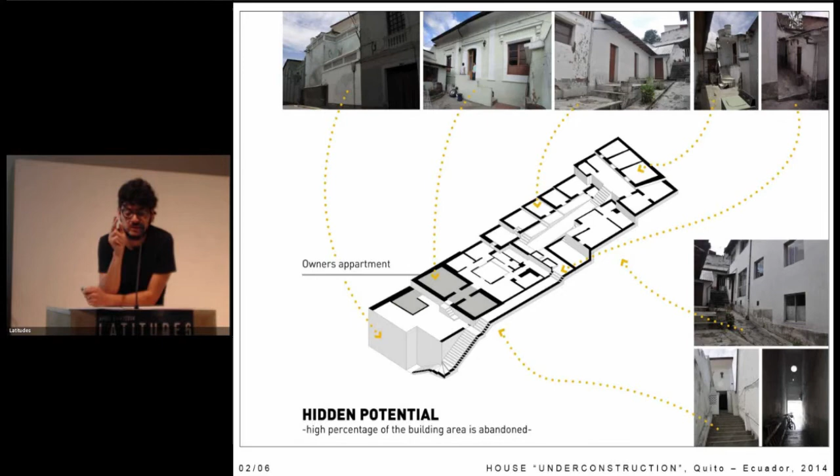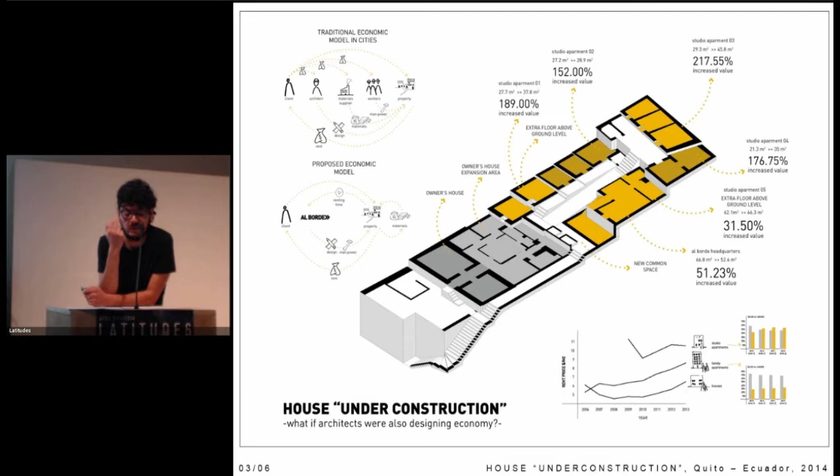And of course, we did the first stage, our headquarters. The next week, we'll begin the second stage and so on. We expect to finish the project around 6 months.

We learn recycling buildings by a punctual intervention that could be replicable, adaptable, or transformable. So we are proposing a micro-intervention of macro-scale ambitions, and we thought, what if each abandoned house had the opportunity to reborn?

All of this could happen in our minds because we understand resources are more than money. It's completely possible to build a school in the middle of nowhere with a $200 budget, when besides money, you have resources you have on hand. We created a list of resources and realized that $200 is a good budget.

Finally, we had a build-it-yourself strategy, and the community, the teacher, and us would be the manpower. We also did a volunteers open call. When architecture is dealing with hard realities, usually architecture as definition is the last part to solve in the equation, as you could see.

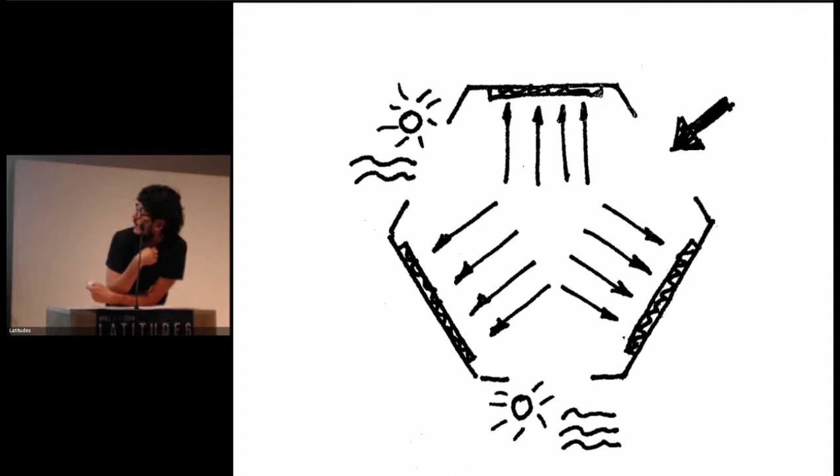Primary schools in Ecuador have 6 levels, 2 levels in each phase, 2 facades for light and ventilation, one for entrance, and it's perfect, clear, it works. But it works for a traditional school system. This school promotes learning by motivation, and of course, it should work differently.

On the other hand, we wondered why people here in this community, on that beach, only build floor plans as a square or rectangular form. And it's completely obvious - a regular form has less waste, inherent sustainability. Later, we learn that they also build square or rectangular floor plans because they don't have any external references.

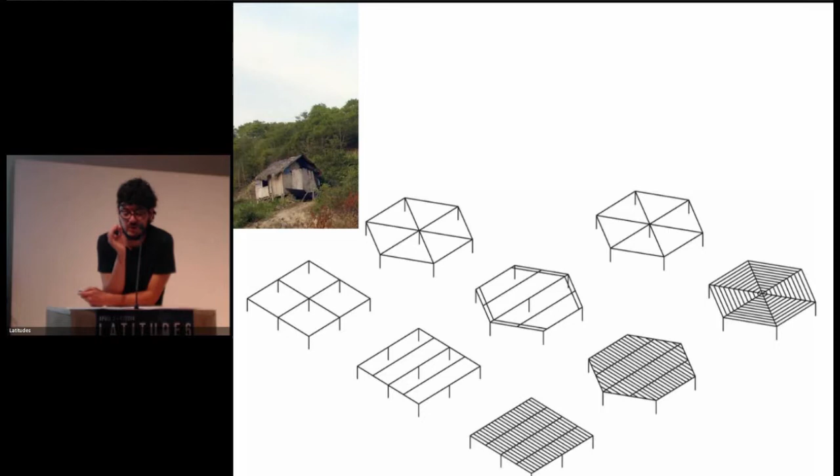Highlight this in your mind. You will need it at the end of the lecture. We learn that they also build square or rectangular floor plans because they don't have any external references.

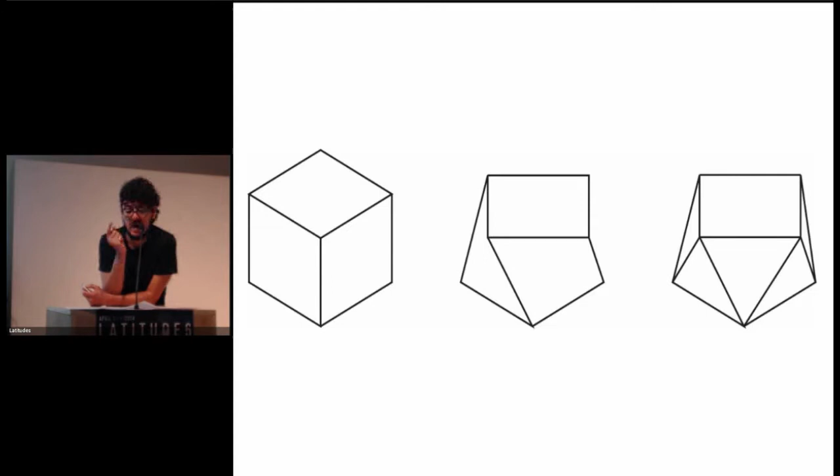So we decide to start with the basics, with the resources that we have on hand. We began with a square base, with a framed wooden structure. And of course, such a basic structure will tend to twist and would require diagonal bracing. We started with the resulting torsional structure and with the diagonal braces that are part of the structural system.

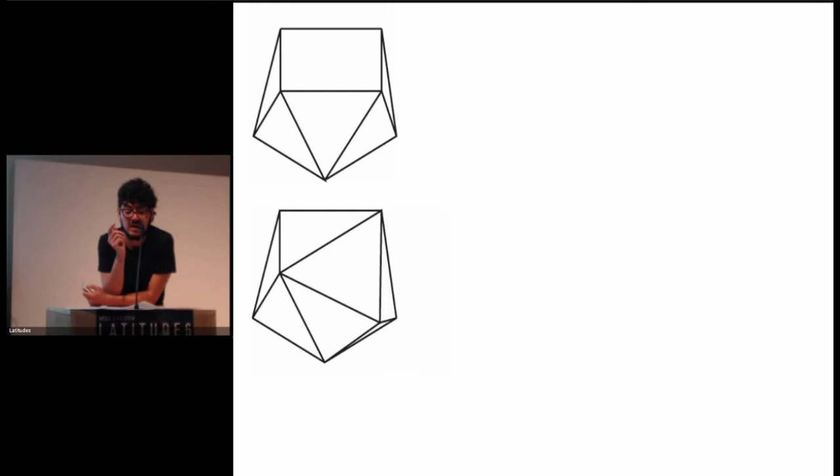Then we knew the cover couldn't be flat because the cover materials would be made of straw, which requires it to be inclined. So we put a ridge cap and took down the two edges. And finally, we raise it on pilotis.

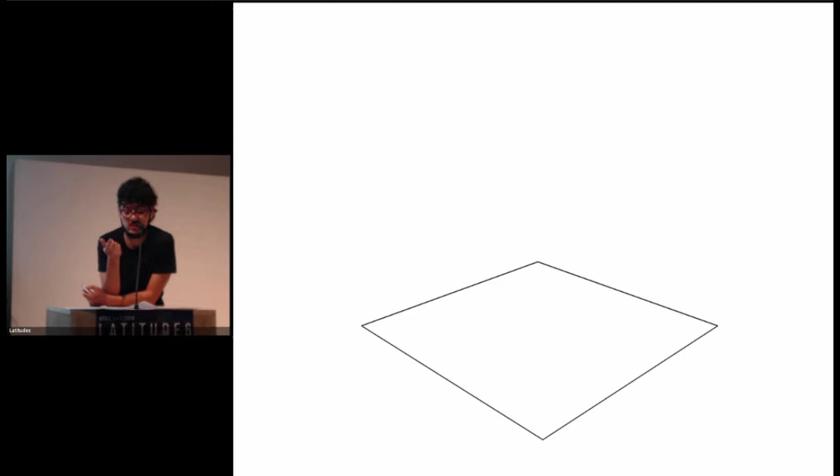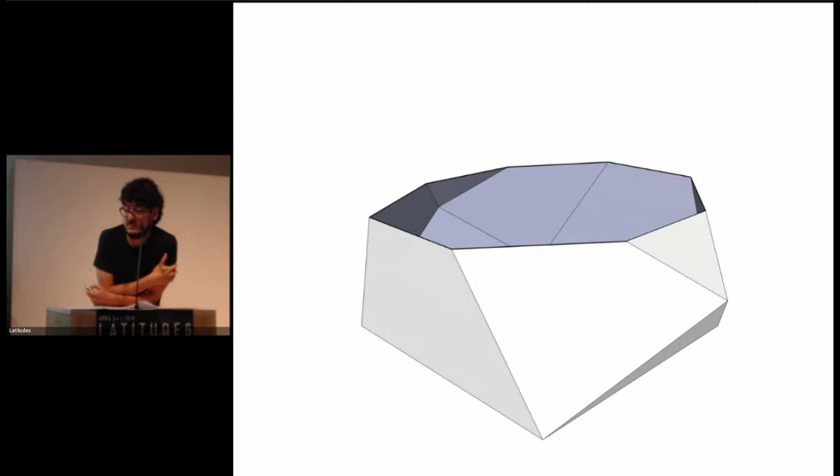And voila! We have a project with a 6 meter square base, easy to construct, a space fully dynamic that promotes multiple uses, and ready.

Now, let's move on to the construction phase, the construction stage. With a 1 to 10 scale model, we worked on the hard part - the nodes, all of the nodes.

We searched in technical books how to design these nodes. And of course, there were thousands of options. The problem was that a single node may cost the same as the $200 project budget. Obviously, it was out of question to tell the teacher the project couldn't be done because the nodes were expensive.

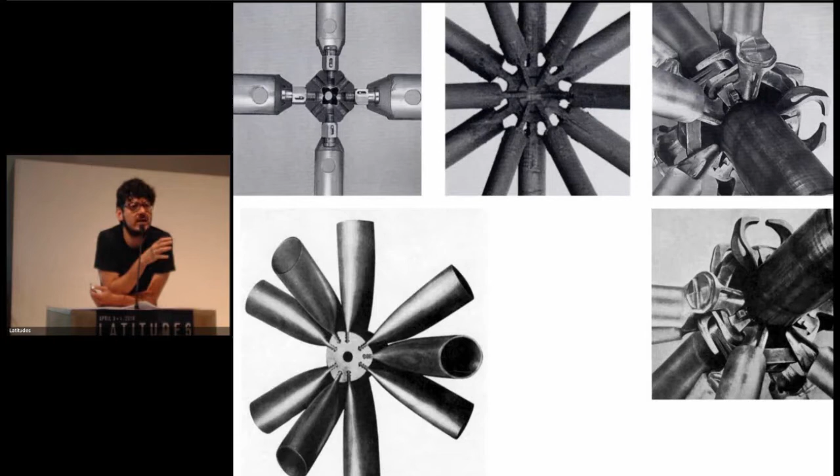We can't hide behind the lack of budget - we must figure out a way to execute the project. So let's look back: how were nodes made before society had access to elaborated solutions? We found that the nodes were solved with cowhide.

We always had a great team of interns willing to do anything to contribute to the design process, very motivated and passionate, and they were the ones - Pablo and Javi - who went to search for the animal. Tests were made, and the tests were made, and that was it. Problem solved - the nodes are solved.

So the project was achieved in a very simple way. Everything was systematized, not only to be able to build with volunteers, but also because it makes the construction process easier for us.

This insane systematization is the lesson we learn, because we were students of Jose Maria Sainz, and later we worked together, and all of this information he gave us about systematization and rigorousness was recorded very deep in our minds.

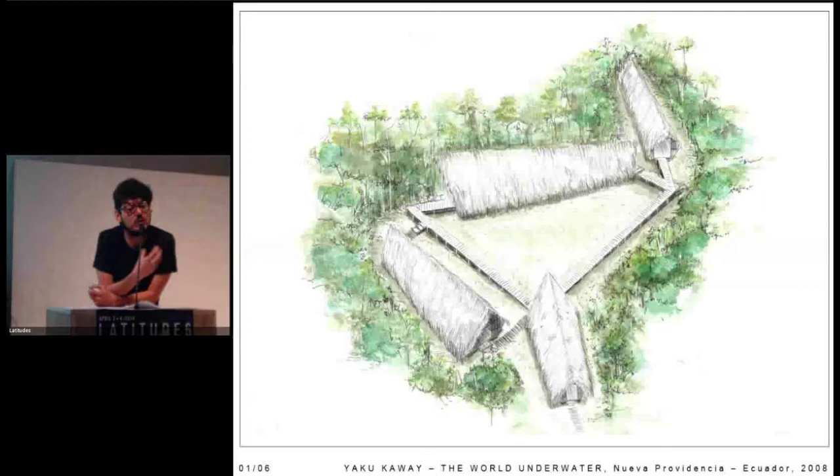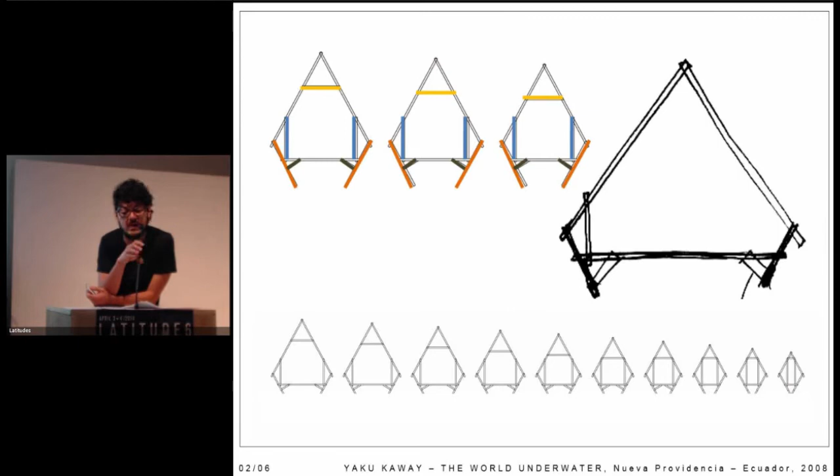Coming back to the scaffolding, we went to the beach, set up a camp, and started to build. With less than a week's time, the project was almost completed.

We didn't care if we finished it or not. When we are working with a participatory process, the empowerment is so strong that the project is achieved very rapidly by the community itself. It is very different from working with charity logic or like a typical NGO giving projects, which are quite difficult to maintain over time.

We really hate charity. My grandmother used to say, when it costs, it hurts.

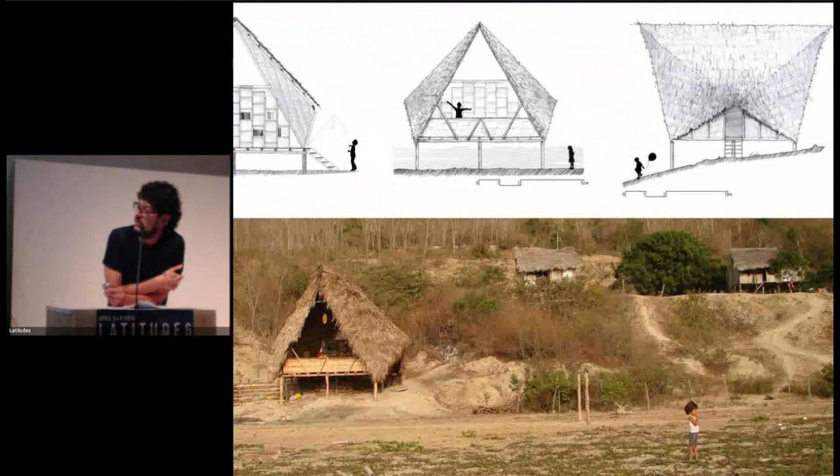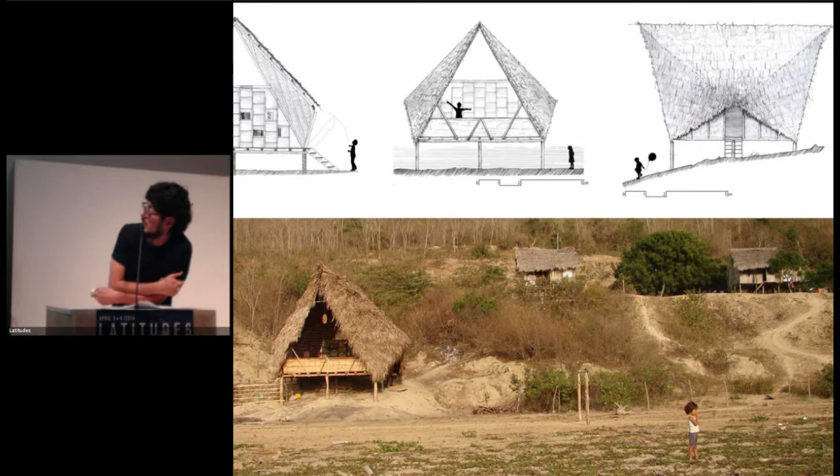The context adaptation is inherent. We use the same materials and construction techniques that local people are used to building with: wooden structure, elevated on pilotis, bamboo or wood walls, and a sloped roof made of local straw. The difference lies in the design.

The project beats all our expectations. The teacher told us, half joking, half serious, he doesn't know if kids are coming to the school in quest of knowledge or to play opening and closing the door.

Each detail was designed. The furniture, one of the keys of the project, was made of two pieces that are easy to assemble.

This, what seems like a parametric design, is actually not. It is the result of an accumulation of errors of the back wall. It's kind of an X-ray of all of the errors of the back wall.

And when working with unqualified manpower, it is necessary to develop mechanisms to take advantage of error. The project is so simple.

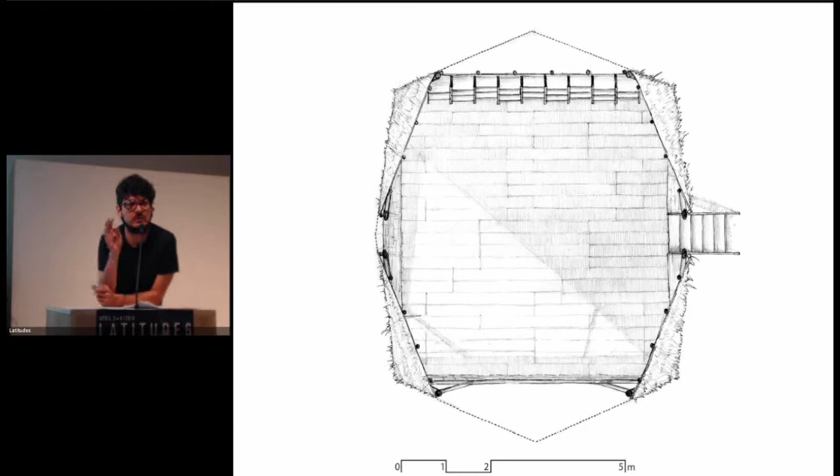Free plan to promote multiple spatial configurations, and a big storage wall. That's all. And the storage is open so that all learning materials are visible and promote their use, and is part of the learning methodology to learn by motivation, because you have all of the materials accessible to the kids, and you can try all of the configurations.

Every time that we go to the beach, the configuration of the floor plan is completely different. Before New Hope School, the nearest school was an hour and a half by foot.

It was assumed that the story would end here, but not. The project was very successful, more than we could expect in our best dreams. And not only children came, but also adults who wanted to share and learn. The new community center would be 5 times larger than the previous school.

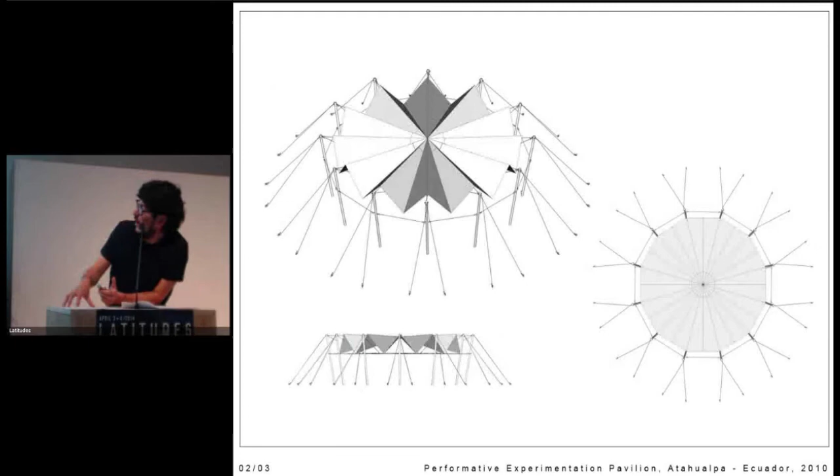It is pure geometry. The quest for material optimization that we always look for would always lead us to search for the most efficient structure. And for us, simple structures of high performance are the best option.

Once more, the project isn't over in the established week of construction time. As I told you in the first project, it doesn't matter. The space was immediately conquered.

The spatial potential was understood little by little. The limit of the use of the space is the imagination of the users. It can be adapted for teaching and community activities.

Inevitably, unexpected uses appear. And please, someone could please explain to the kid that according to Neufert, this area under the pitched roof isn't considered useful area.

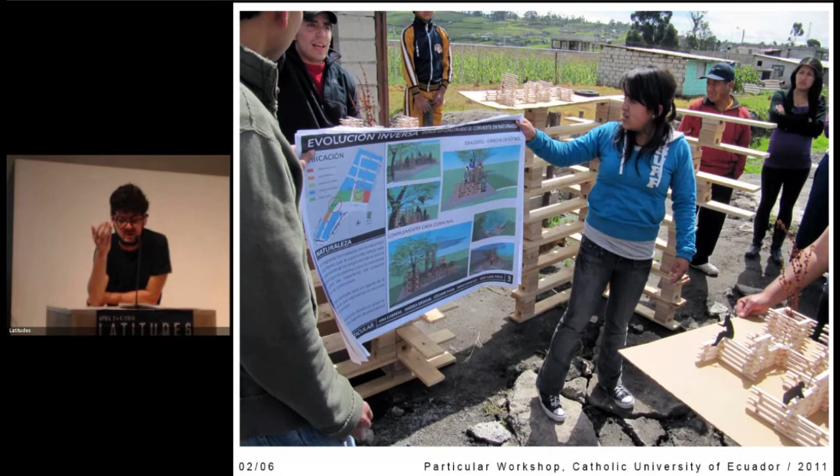But when they build by their own hands, there is a twist in their minds. And they understand that when you know the materials and the construction techniques, you think with your hand. We really like this breakpoint moment because it happened to us and it was inevitable. Our mind changed too.

They know how to build. Here are a couple of images of the workshops with the students in different places.

Back to the beach. They know how to build, and they are experimenting with the space.

What happens if we create a school of architecture in this beach? We began to think about it, and we began to ask ourselves, what is essentially necessary to make architecture, or to teach architecture, or to learn architecture?

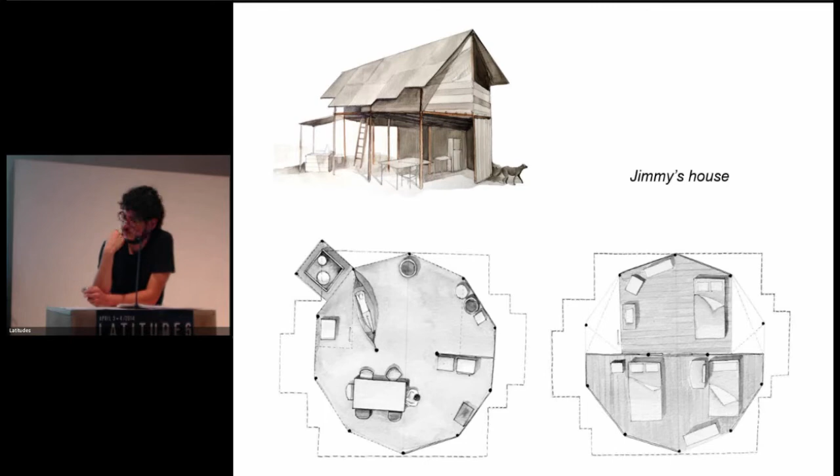And the answer was: first, to be aware of the reality that surrounds you. Regular architecture students are not. People from the beach are.

Second, to analyze and synthesize abstract ideas. Regular architecture students are familiarized with it.

These people are not. Third, to translate those ideas into a space. Once again, people from the beach are not familiarized with this process. Regular architecture students do. Fourth, to know the materials and the construction techniques.

Regular architecture students don't know much about it. They do. So, if we create a school of architecture in this place, maybe we should concentrate our attention on subjects 2 and 3.

So we arrange a 4-day workshop each month. We didn't know what could happen, but we were really interested to push up the limits of the teacher, of the community, and our limits.

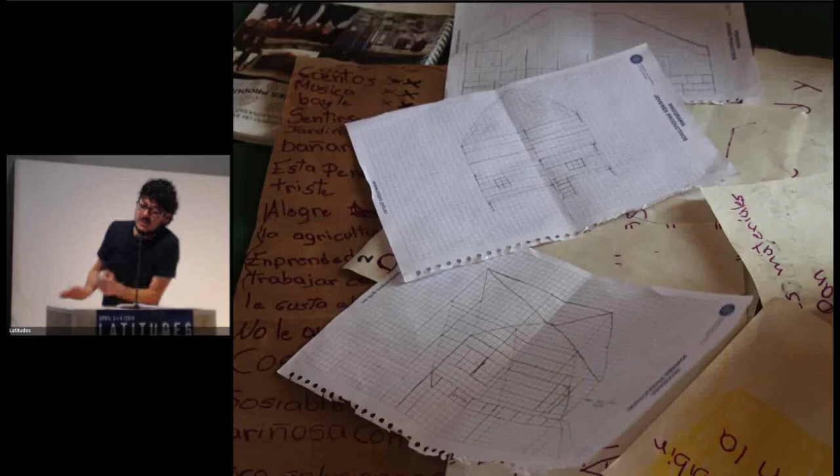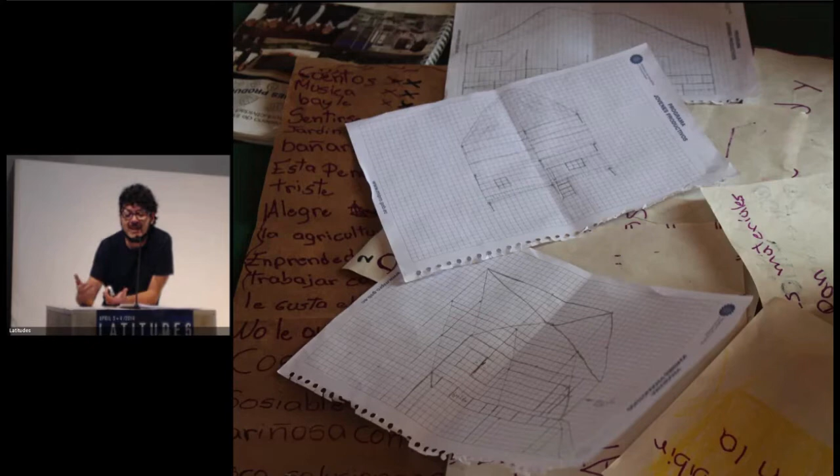We designed one workshop at once. This is a complete adventure. We are completely free to change the syllabus because we are the school as much as we want. So we can do everything that we want and begin real experimentation on site. We don't even have a deadline to finish the projects. Total freedom.

We have completed 8 workshops by now, including conceptual approaches to furniture design. We have 16 students from age 14 to 72 years old. The design methodology consists of a process which starts with no preconceived ideas, pretty similar to the methodology that we use in the office.

Then the students make an exhaustive investigation about the variables included in the project. We started with the kindergarten as a real project exercise, so the students investigate the teacher, the children of the community in the age of 0 to 6 years. Then they analyze and synthesize the data into a concept idea and concept model, and they built concept models.

This is the idea that they are working on. Then they translate it into a constructive model using local technology and materials, no CNC plotters, nothing like that. All of this is worked on by them.

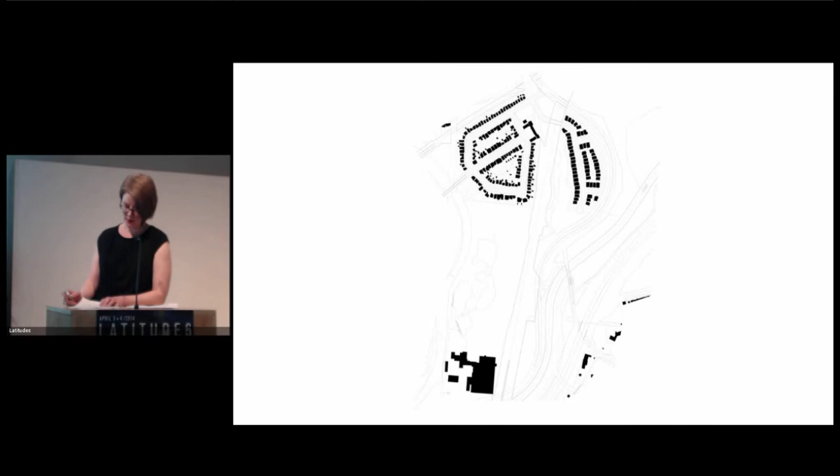Looking at this map of Toronto that shows the ravine and figure ground, we see that our urban work is spread across the city, from denser interstitial sites in these smaller neighborhoods to ones that back up onto the ravine system. One such project, the Bala Line House, is situated on a ravine that has an old rail spur across the bottom that connects it to the site of the former brickworks that literally built the city of Toronto.

And here we have the block configuration. You can see all the houses are kind of lined up here, and then the ravine starts here. The property line ends here, but then this is basically a natural conserved area.

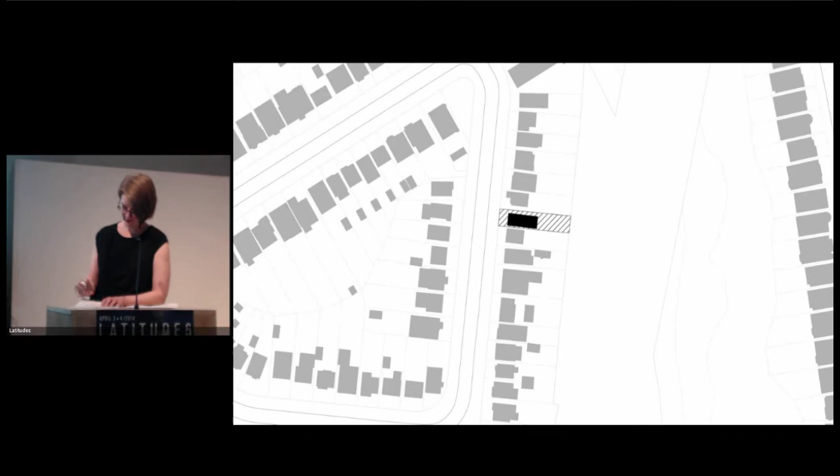As you can see, the house has a massing that slots into the existing lot designation and marches along with its neighbors. So this is the front here, and it goes back as far as we could, but getting a site on a lot on a ravine is actually quite difficult in Toronto.

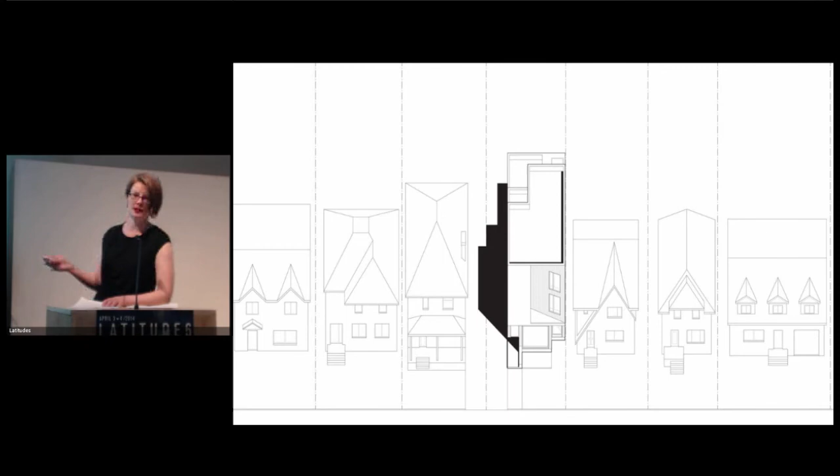So as the front elevation kind of holds the front line, the back has to step back to allow so that there's no tremendous runoff into the ravine. And this house is not quite done yet, it's still under construction.

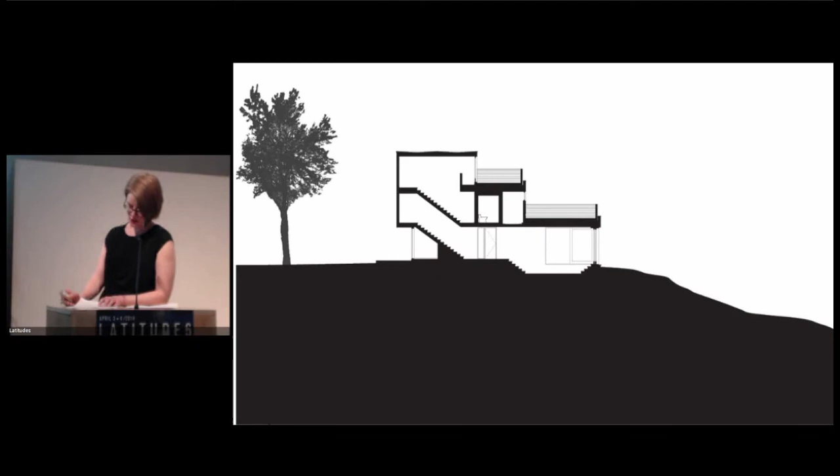In section, great effort was made to reinforce and replicate the slope of the ravine as it figuratively comes up and into the house. The reciprocal view from the living room is framed and shared with the kitchen and dining room a half story above, and even from the front of the house.

So if you open up the doors in the front and the doors in the back, you can actually see right through. And one of the reasons why there's so many large movable walls is not only for how it looks, but recently we've been getting a lot of requests, which is a little bit of a surprise to us, for houses that don't have air conditioning.

And so the mechanical system is very light. It's a warm floor with radiant heat, and there's a provision for a condensing line, but we didn't install anything when the house was built. So you open up the front and back of the house, and all the warm air flushes through.

So just to follow up on that last slide, even in the city, we have projects that endeavor to capture the landscape, frame it, and create a domesticated experience.

The primary focus of this talk will be a project set in southern Ontario's cottage country, about 2 hours north of Toronto. Cottage country refers to locations of recreational properties anywhere from a few hours to a half-day's drive from an urban area. Cottages are not exclusively for the wealthy, as they can range from small one-season cabins to proper four-season homes, and there's a strong rental market for those who don't own. There's also a very large market in provincial parks of cabins and small cottages that you can use.

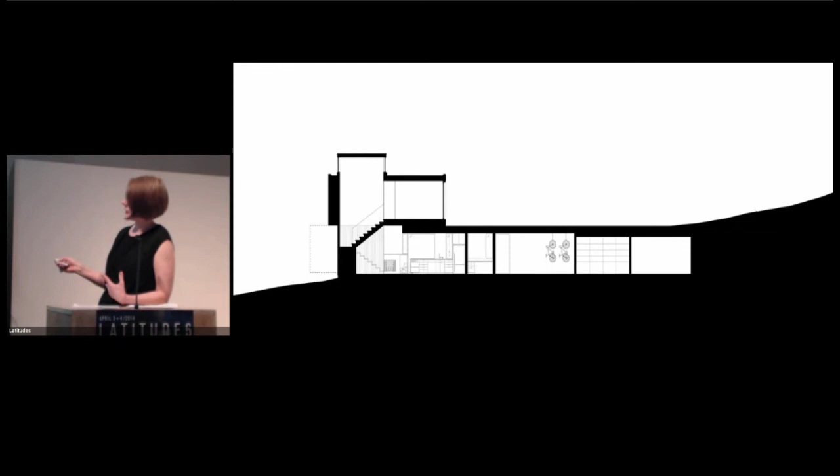There was an opportunity for a double height space here, right at the entry with a stair. It held the kitchen and all of the storage elements, a computer niche work area for the children, a large bike shop for their bicycles, storage, and a mechanical room in the back. You can see we took it right into the hillside as far as we could.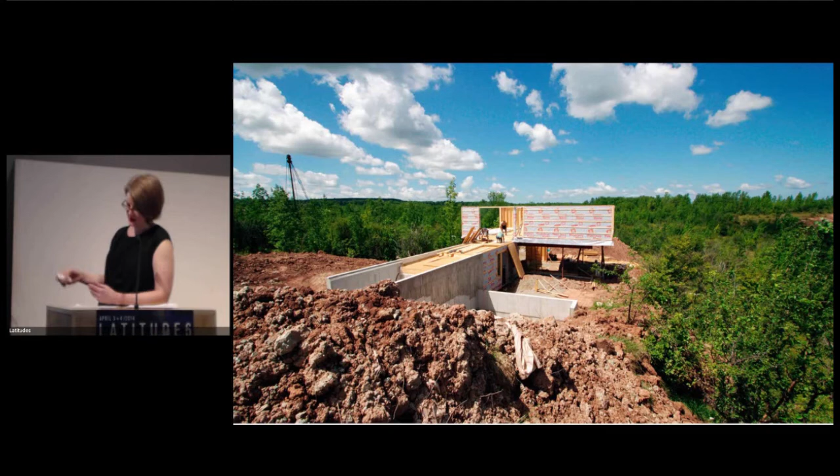The ground floor plan shows this again with the glassed-in living room here, and this is the stair to the second floor. You see that we created a patio here that basically doubles the living space for an outside space that can be used in basically 1.5 seasons.

Now, our watershed zone started around this location. As you can see, there isn't a lot of tableland, so in order to get any outside activity space, we had to create it on the slope side of the house.

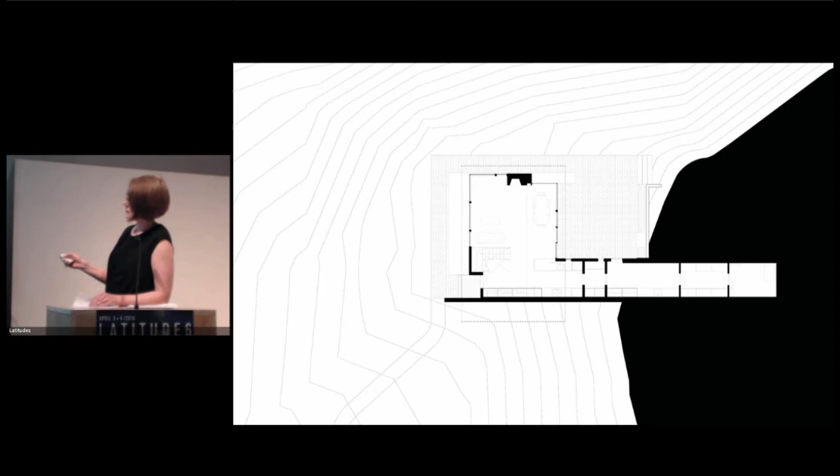I want to talk about the transition to the second floor via the stair. Now the stair became an opportunity for passive ventilation. As in the first project that I described, there are basically no systems in the house.

Part of when we got the budget for the house, it was much, much higher than the client could afford. And she said, if it doesn't come down substantially, it basically doesn't get built. So one thing we did was take out the mechanical system because that was a big chunk of money. So the house is heated with, it's a 4-season house, heated with radiant heat off of an on-demand electric resistance heater that's in the mechanical room.

So there's no water heater, no air conditioning, and so again, you open up the sliding patio doors here, and you open up the clerestory windows on top, and the house gets flushed. The only thing we had to do was fresh air with an HRV because it was required.

So you can see the stairwell is light-filled, and it provides light into the center of the house below. And here's a section showing that as well.

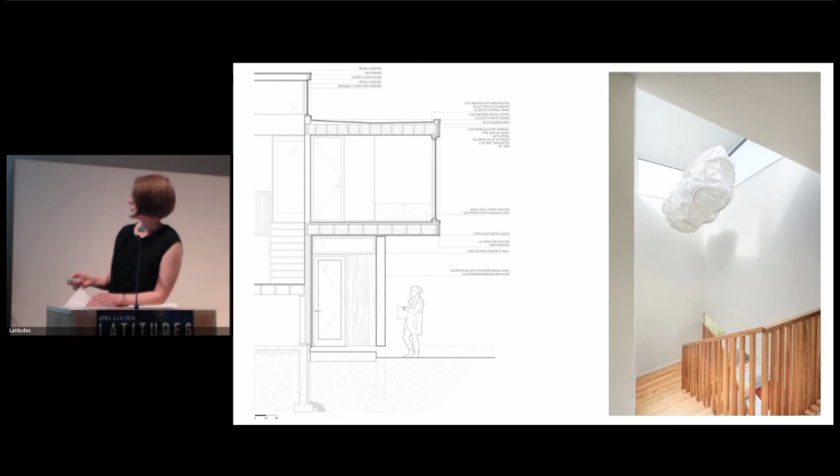Here, the idea of the stair was to reorient you from the ground floor patio below to the landscape connection between the family room and the hillside beyond. So trying to kind of reinforce this connection to the landscape at every point possible in the house.

The second floor plan shows that this has quite an opaque facade. So the idea here was to basically make something that could make the rooms inward looking as opposed to outward looking. The idea when you're here of the woman who built the house, and she built it for herself and her grandchildren and her children, was...

That when you come up, the whole family comes together, the house sleeps 10, and that you spend time outside and downstairs with the family and you don't go back to your room. So she kind of wanted to make the bedrooms as mean as possible, and so each bedroom just has one little window, with one facing each orientation.

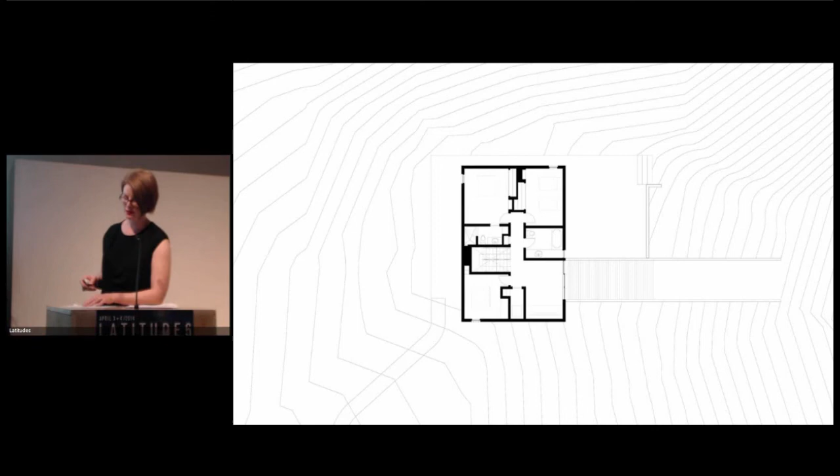And then there's a large window connecting the family room to the hillside, and this is convertible as a 4th bedroom. You can see that in this elevational image as well. These really tiny slot windows are the only kind of light that you get into the rooms on the second floor. And this is just a view of one of the bedrooms.

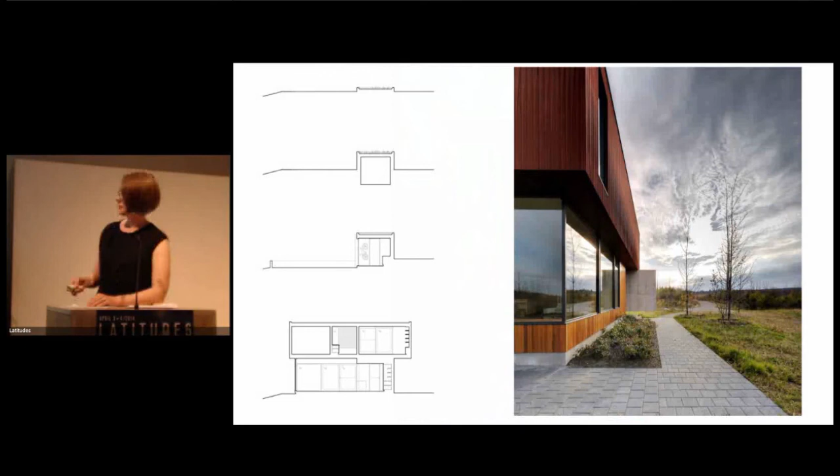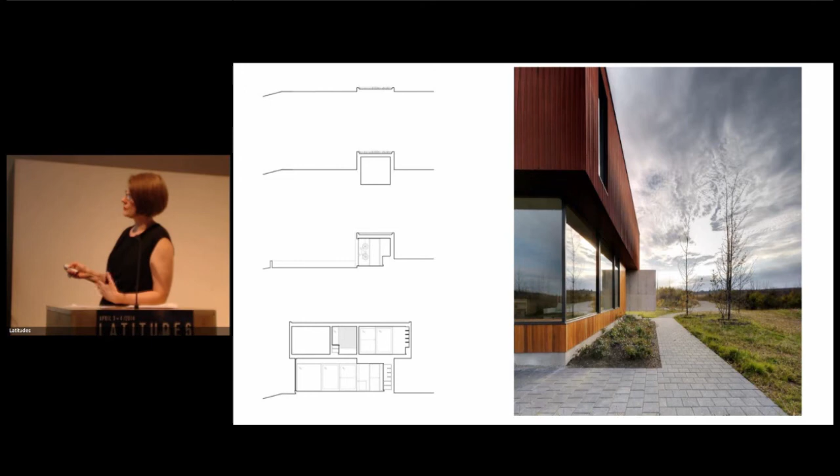Now, part of the interest in designing the house was to reinforce this datum line, starting at the top of the concrete wall, going back to the hillside. So in section, as you're back at the hill, you see the tops of it kind of poking out here. As the hill pulls away and the house moves forward, you get the storage spaces in the bike room below, and finally, the house coming forward on the outside.

And the detail sections also show this line. So this datum line is here, and it became really important for us in construction to maintain that line. So the red box on top sits about 1/4 of an inch above, and the concrete wall sits about 1/4 of an inch below.

We also wanted to talk about the compactness of the floor and wall section. Given our climate, you need a lot of climate control. One of the things we talked to the owner about was that the more insulation you put into your house, the better value it is. Using a highly insulated envelope is one of our first strategies when you want to control energy costs.

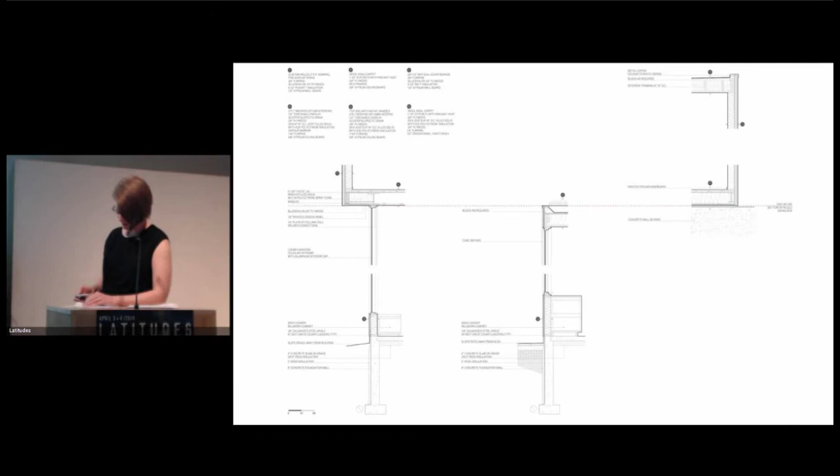A lot of our clients come to us with the ambition to do these more technical green systems - geothermal heating and hot water, radiant hot water heating, solar hot water, solar energy - and all these things tend to fall away fairly quickly. But one thing we insist on is that the better envelope you build, the less energy you need in the first place.

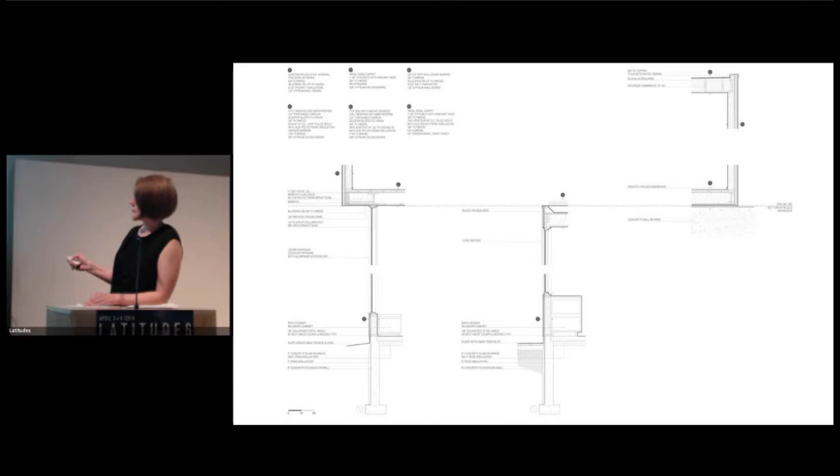One of the ways to achieve this datum line meant that the structure had to be doubled. On the lower line there's a system of structure, and on the upper line there's a system of steel beams. One of the places you see it inside the house is in the split between the living and the dining room.

I feel a little odd calling this a low-budget project given the work we just saw, but I'm going to call it - this is a low-budget project. And there's a few things that we did.

The radiant floor heating meant that the floor slab is the concrete slab, and there's no finish on top. The windows were all commercial windows, and we basically got the biggest one that the company would make. We have it in this orientation here, and then due to the lowered structure, we have it in a lowered orientation there. So there's a few nice things we were able to do with fairly simple materials.

This is one of the obvious iconic moments of the project - the fact that it's embedded in the landscape. And often when we talk about this, especially with students, there's always a notion that to embed something in the landscape means you're treading lightly, that it's a small gesture tying the architecture to the land.

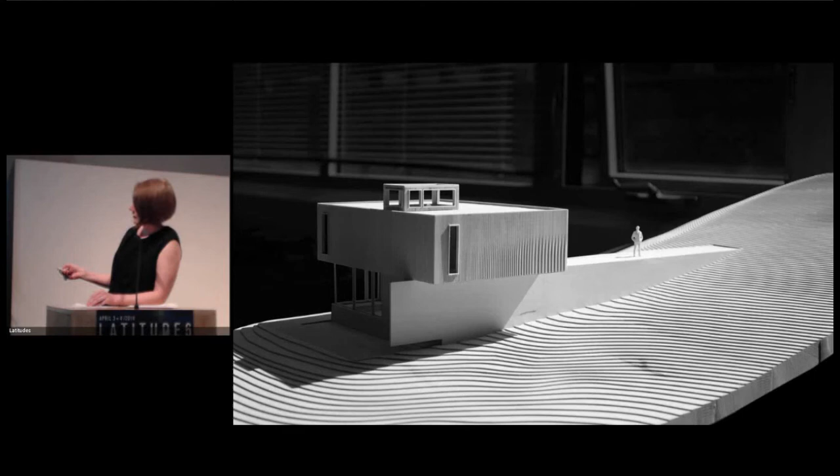Even in the model of this project that we have in the house, we really love the fact that the contours are perfectly aligned and perfectly spaced up the edge of this wall. And in reality, it's a very different thing.

The construction site - when you build up north in cottage country, the contractors are kind of like loose cannons a little bit. So they thought nothing of a 14-foot straight cut on the side of a hill with all of this mass behind. We did have some clay soil, but it wasn't nearly strong enough. They thought they'd just basically go for it. And this is two days before a massive rainstorm up north.

We get a phone call Monday morning - that's Mike, and we were trying to save this tree, by the way. Mike says, we lost the tree. I said, well, how did you lose the tree? He said there was a giant rainstorm, and if they didn't bulldoze the top of the hill away, we were going to lose the entire hill. I said, okay, that's an interesting conversation I'm going to have with my client - all she wanted was this little 2,000 square foot house, and the architects come along, and all of a sudden we're bulldozing away like the tallest hill on her property.

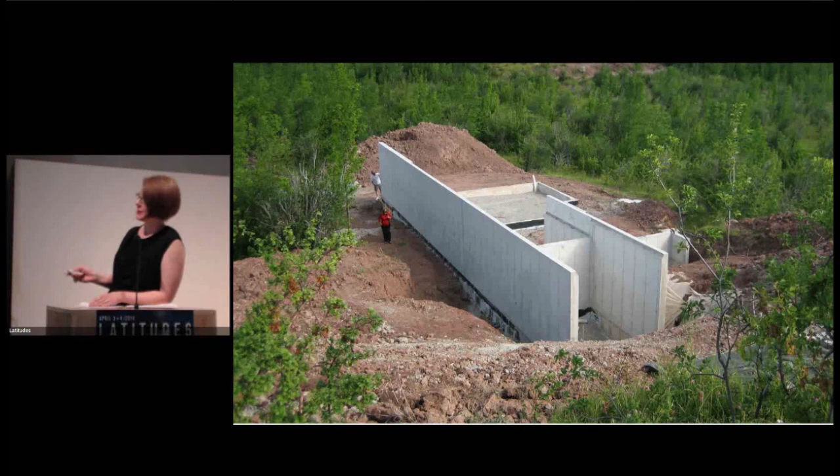But the reason they did that is, here we again talk about the strangeness of economies of construction. When we designed the footings and foundation for the house, it's exposed here, there's a cantilevered portion on the end, and then the hillside starts about here. That's our client Merle there, and the hill slopes up, and you see maybe two inches of the concrete wall on top.

To our eye, putting in stepped footings made a lot of sense - we come this way, step up, come this way, step up, come this way, step up. By the time we're here, we have our foundation for frost, which has to go four feet below grade, but there wasn't nearly this much concrete in the project. For economies, the contractor decided to use commercial formwork, so the value of the material was much less than the energy it took to figure out how to step the foundation.

So he decided just to build it all the way down to the ground. This entire concrete wall is basically buried, except for 2 inches that you see right at the top, in this one as well. So the formwork for the commercial foundation is basically reused steel form, and they get kind of junky looking.

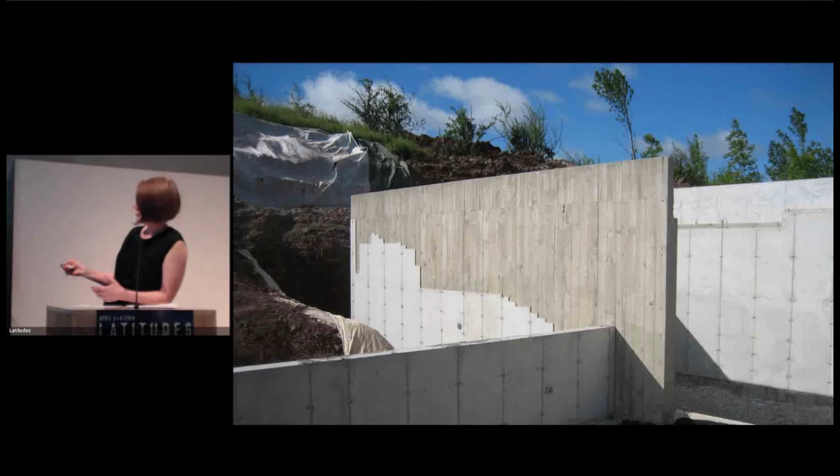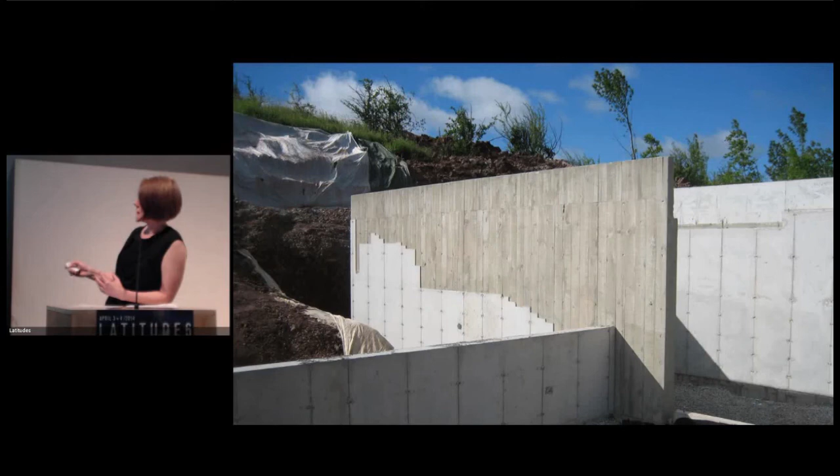So one of the design details we added on the back was a board form wall. This datum line here is the top of the window in the dining room, and you'll see it picked up in the next slide. Where economy was an issue, they only put the boards in as long pieces as they had laying around the site to get that effect. And in the final project, you see that here.

So this is the part of the talk that I call digital diversion, or maybe digital digression. One of the things we try to do in our practice is incorporate advanced technologies with really simple materials. As a young practice, we had at hand a 3-axis CNC milling machine at the University of Toronto because our partner Shane is on faculty there. So what we started doing really early was experiments with wood because it's light, cheap, and machinable.

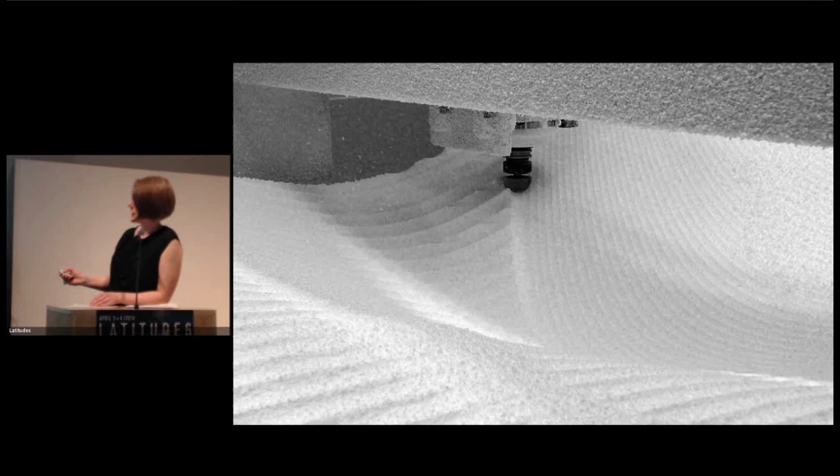For those of you who don't do a lot of this yourselves, what's important to note when you see projects—and there's a ton of projects using this kind of research now—this is something that's kind of dropping off a little in our practice, but was really important at the outset: the machine, if you program in the code, will make the most economic roughing pass that it can.

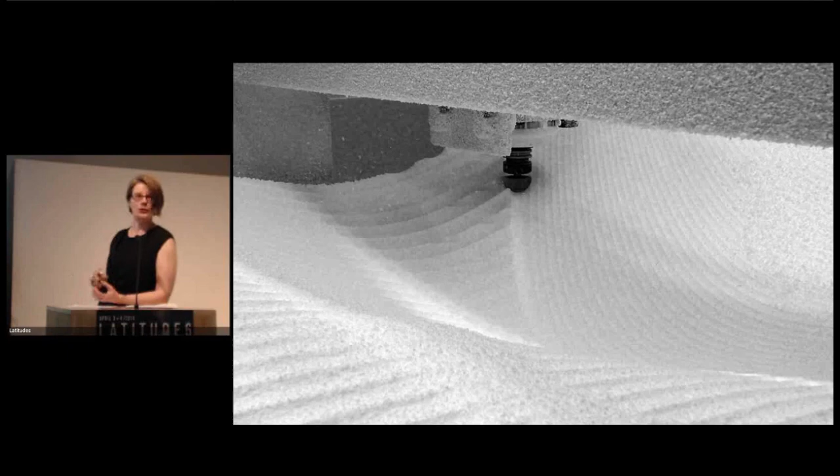So the machine knows how to do that on its own. These roughing passes are not determined by us. These finished passes become really important in the design work, especially if you care what the thing looks like at the end, and there's a lot of registration that has to happen—you have to go back

and program in your finishing passes, these isoparametric lines, by hand. This is the built piece. This was for an installation that was up for just 3 days, so we made it in basically a recyclable foam material, so we could do the piece and then ship it off to the recycling plant, where it would be made into styrofoam cups and stuff like that.

And so the registration lines that you see here—this is the bottom of one block, this is the side of one block, and the blocks are 4 feet by 8 feet in dimension. This is the second block coming toward us on top of it, and that's the third one there. So there's about 24 blocks total in this piece. The wall's 24 feet long and 12 feet high.

But what was really important to us was making sure that these lines, which are very subtle in the piece, register these isoparametric lines across. And that's not something you can do by just telling the machine to do it for you—you have to bring that to the project.

So at the end of that larger chunk of research and installations that we had done digitally, we very quickly learned that we're not the ones to make a building on a CNC machine, but potentially we could make parts of a building on a CNC machine.

Now in Canada, we work to embrace the landscape, but we also work really hard to reject it. The rejection comes in the clear delineation of the envelope. We make a layer around the structure and fill the space between with insulation, not unlike a whale. So we've got the structure here, then we've got all of this kind of fat and blubber around.

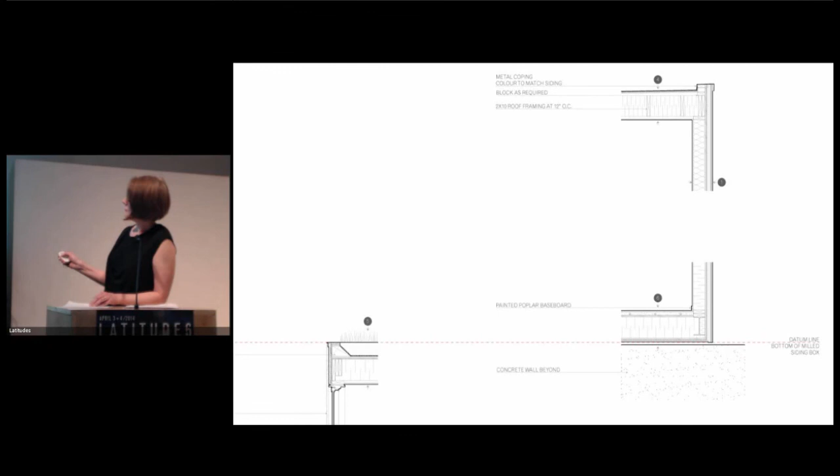Our version of that is all the layers of insulation, vapor barrier, et cetera. So the wall section in this project is this milled surface, strapping, airspace, ice and water shield, which is basically like a bathtub wrapper around the outside of your building, a sheet of plywood that holds the stick construction together, which is also another North American phenomenon—we don't build in mass construction. You insulate as much as possible, and in our office our minimum is R30, with projects that have up to R50 wall sections.

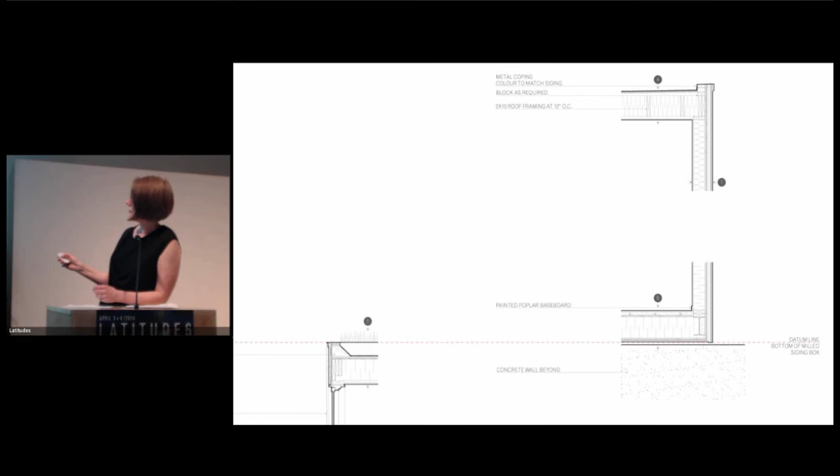And then you have the vapor barrier on the inside, so any moisture from the inside doesn't work its way into the wall through pressure differentials. And then you have the inside finish. Now, what this allows us to do—so we have thick walls, but they're not due to mass construction, like mass timber or rammed earth or concrete. But we have the layering required to maintain a constant and consistent differentiation between the interior environment and the exterior environment. Now this gives us the opportunity at the outermost layer to do something that isn't necessarily tied to the wall assembly behind.

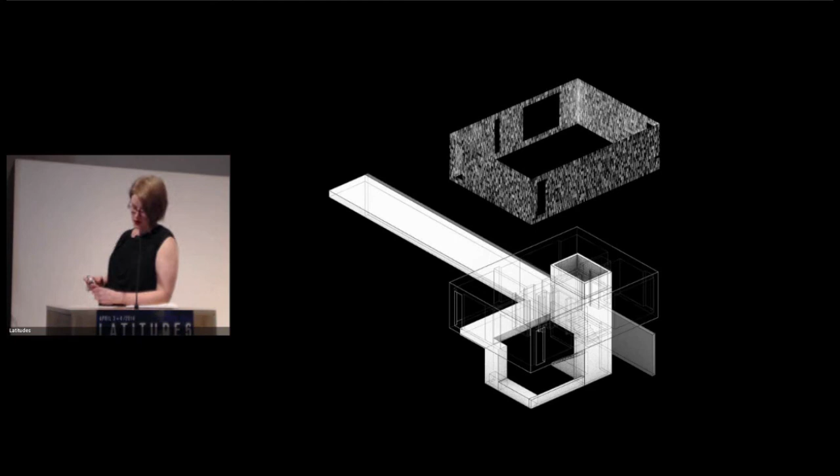This axonometric shows the second floor skin, the concrete wall here, and the wood wrapper that defines the glazed area—basically the solid elements of the project.

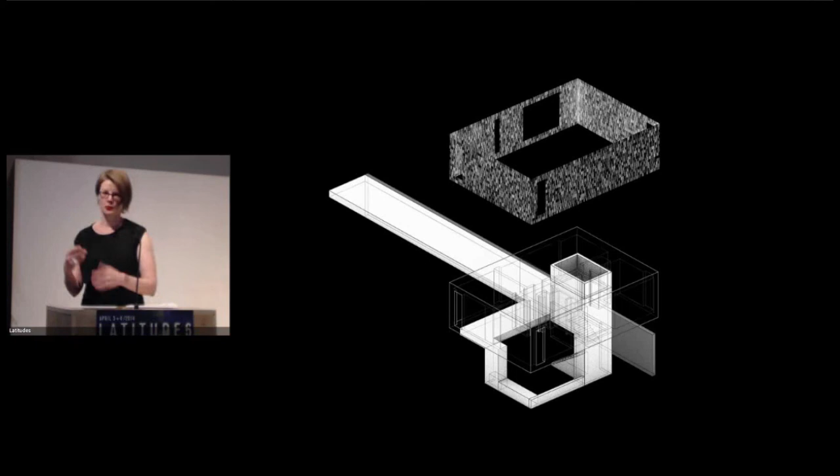In the initial discussions we always knew we wanted to bring fabrication to this project in some way, and the initial thoughts were to do a customized milled cement board panel. So we got cement panels, chopped them all up, tried to find a way to make them random in a way but yet not look random, and it was kind of a disaster. It didn't work all that well.

So eventually we came back to wood, which is a material we use all the time. Again, it's fast, it's light, it's easy to machine, and it's really cheap. So the idea became to develop a skin for the building that could register the sun as it moved around the house by creating a skin that would basically make shadows.

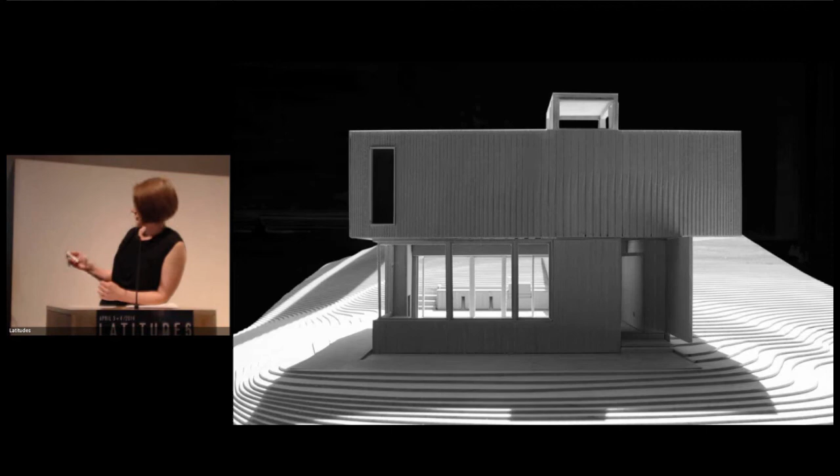What was kind of funny is that we, the people in our office doing the milling work, thought that whenever you do a project on the milling machine, the finished thing comes off and looks really, really perfect. We had a numbering system, so each board was labeled really carefully. It was very precious when it came off the machine because it was absolutely perfect, stacked carefully in a bin.

The contractor, Mike, comes to the site with a truck. The only way to get the boards out of the basement of the Faculty of Architecture, where the machine is, was to open a window and hand them up by hand. So all of a sudden, all the boards are coming out of the basement into Mike's hands, and he's tossing them onto the truck in the rain - like it doesn't rain enough. The staff's jaws just dropped open, like, what are you doing with our precious objects? But obviously the construction was impeccable, and it all comes together at the end.

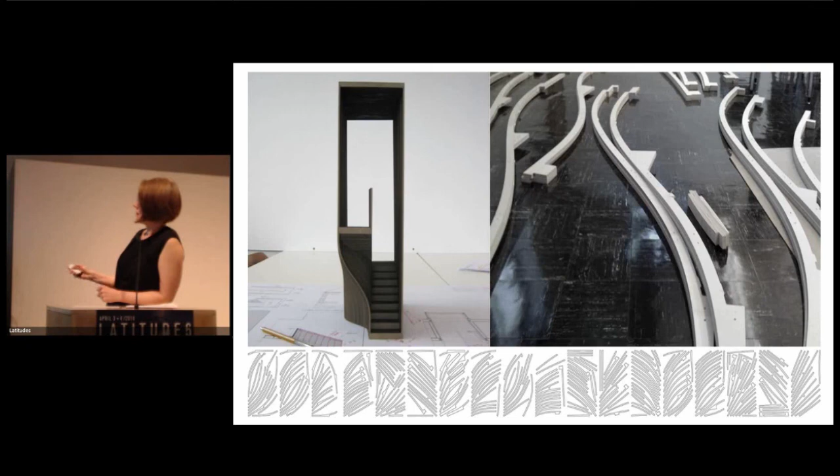These are all the pieces laid out, optimized on the sheets for milling. Again, we milled all the pieces in the shop and pre-assembled them in stacks of about 5, then took them up to the site where we had a carpenter help us install them into place. So behind this panel is a lot of really good carpentry that did not come from our side, but came from the carpenter side.

The idea here was to play with light against the milled surface, so you can kind of fall in love with the fact that the light rakes across it quite beautifully.

Even in very small details such as this - the one mechanical component we had to have in the project was a fresh air component. But instead of just putting a vent in, we decided to figure out how many square inches of ventilation we needed, and spread that apart through this randomized milling surface. So behind this are all the fresh air vents.

And that kind of sums up the story of the house in Frogs Hollow. So thank you very much this afternoon.